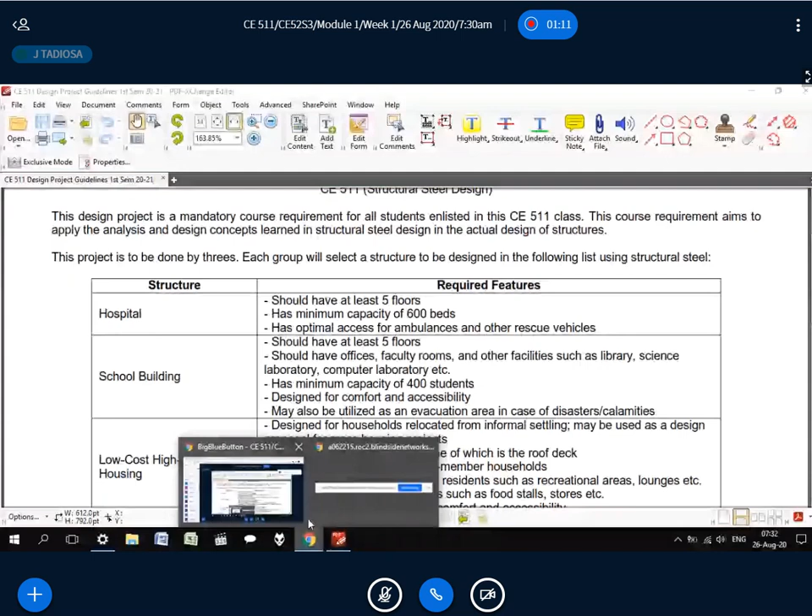Do you see this one, the PDF file? Yes, sir. Okay, so, all right.

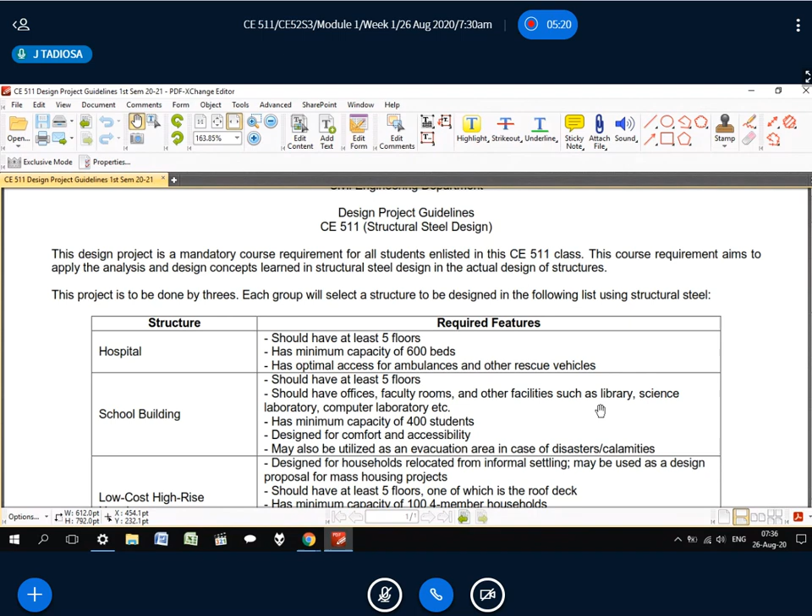This project will be done by threes, so each group must have three members. Each group will select a structure to be designed using structural steel: a hospital, school building, or low-cost high-rise housing. Here are some of the required features I have to see in your design project.

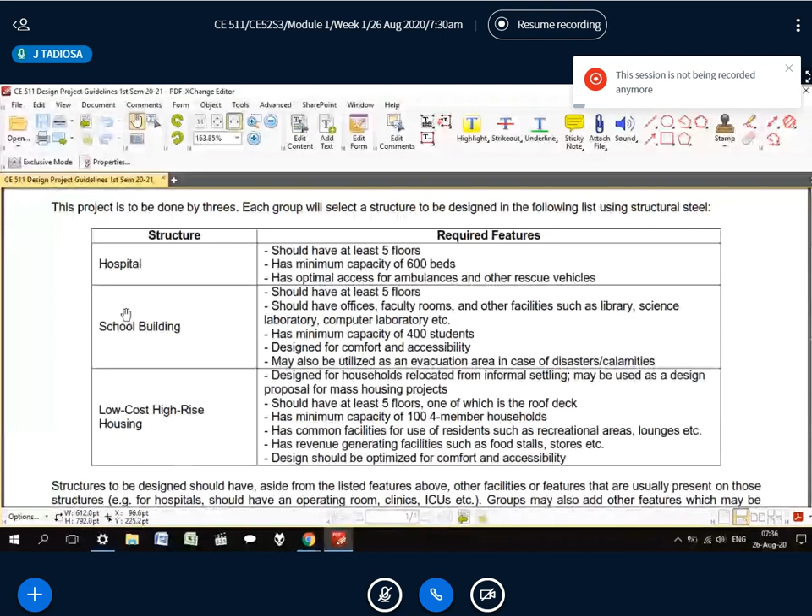For hospitals, it would be this one. For school buildings, it's this one. For low-cost housing, it's this one. Now I want this divided equally among the groups, so I will be the one to assign you to a certain structure. I will do this later on.

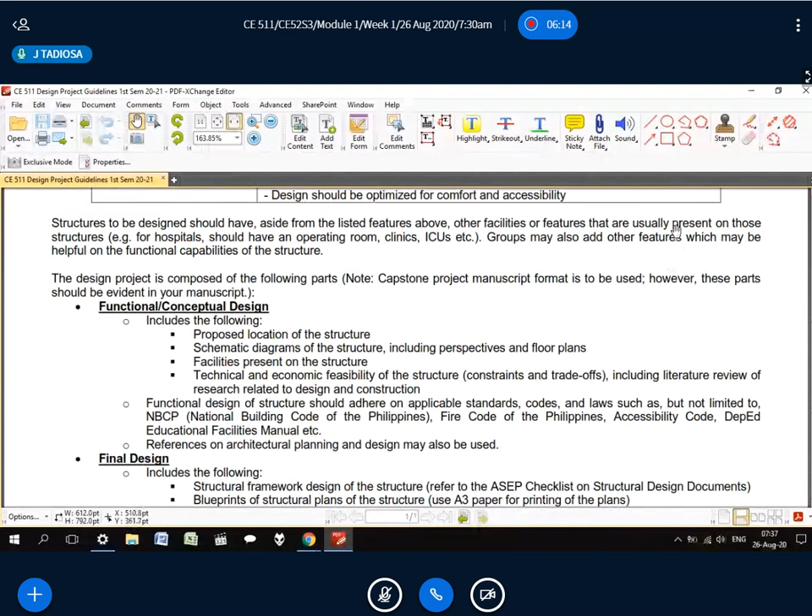Structures to be designed should have, aside from the listed features above, other facilities or features usually present in that structure. For example, for hospitals, design it like a real hospital—it should have an operating room, clinics, ICUs, and other facilities usually present in hospitals. Same thing with school buildings—it should have classrooms, faculty rooms, libraries, laboratories, etc.

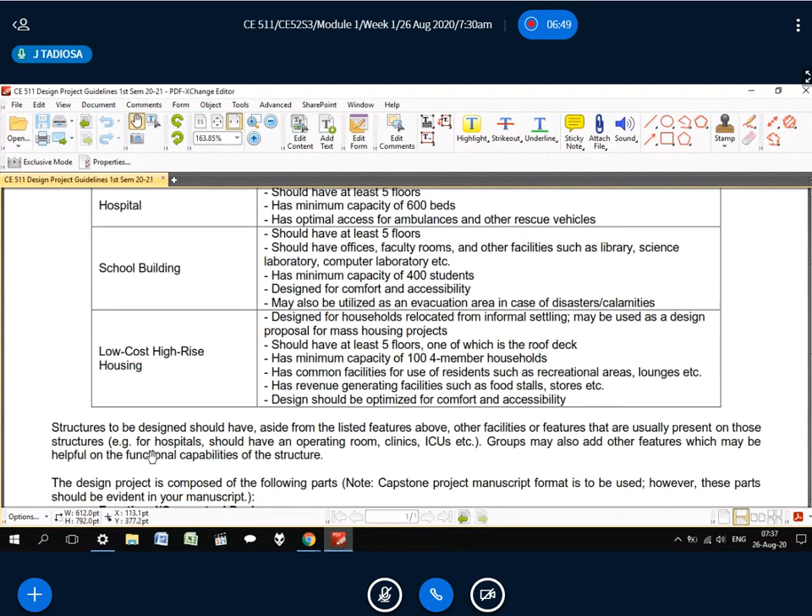Groups may also add other features which may be helpful for the functional capabilities of the structure. When we say functional capabilities, we mean the usage. I will discuss this more later on.

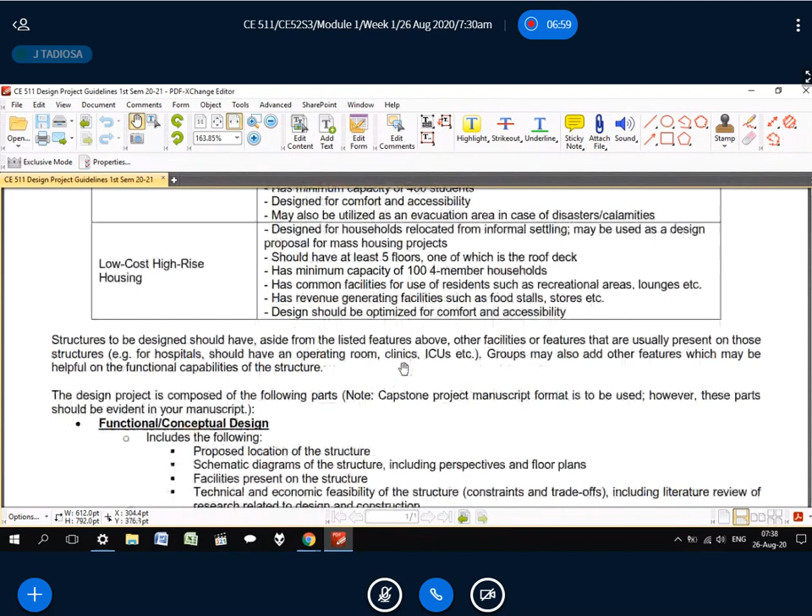The format for the design project is pretty much the same as the capstone, so it will have 5 chapters. I will present a sample manuscript later on. The design should be composed of 2 parts: the functional or conceptual design and the final design itself.

Functional design means you conceptualize the design itself. What do you include here? The proposed location, the schematic diagrams, meaning the building plans, or as we call it, architectural plans. However, I avoid using the word architectural—in this class we call them building plans. Also, facilities present, technical and economical feasibility.

This one is the constraint and trade-off—I will explain this later on. How do you format this? Including a review of related literature related to design and construction. Functional design should adhere to applicable standards, codes, and laws, such as but not limited to NBCP, the building code.

As far as I know, you already learned about this during your building design classes—the Fire Code of the Philippines, the Accessibility Code. For school building design, you also use the DepEd Educational Facilities Manual and other manuals that may be applicable in your design. References on architectural planning and design may also be used, and you may seek help from architectural students as to how to do your schematics.

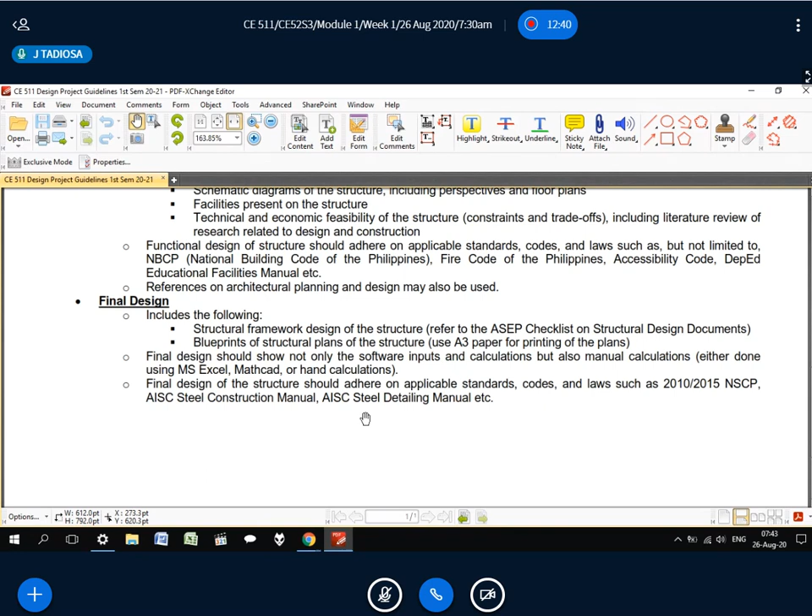The final design of the structure should adhere to applicable standards, codes, and laws such as the 2015 NSCP, not 2010 anymore, the steel construction manual, the detailing manual, etc. Another note here, in making structural plans you need to adhere to the AISC steel detailing manual as well as the format prescribed by the National Building Code. However you arrange the title blocks and the figures there, you should follow the standard rules.

So it has to look like one of those plans that you see at work.

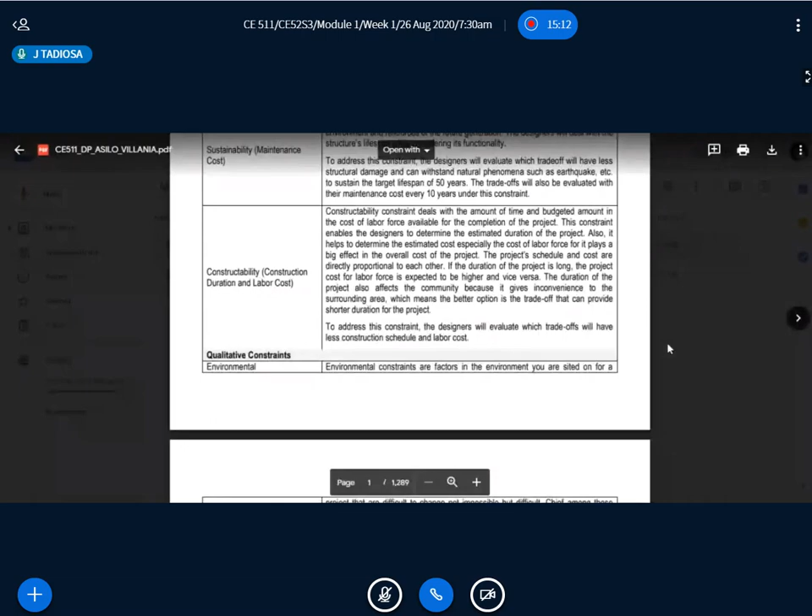The first page that you have should be the design experience information. This one has the same format as that for the capstone design. They lay out the constraints, the trade-offs, the quality standards, etc.

The rubrics don't need to be attached in this case, but they just attached it because they didn't know what to do at that time. They just used the same rubrics as the one used in capstone design. However, in this case, no need to attach the rubrics. So this is the table of contents.

This one is the intro, pretty much the same as that of the capstone: background, location, project client, client specs, objectives, scope and limitation, and the project development plan.

Next is chapter 2, this one I am a bit stricter about. The first thing that I want to see is the location data: the vicinity map, the demography and socioeconomic data, topography or topographic map.

Hazard maps, there are many types: landslide hazard maps, flood hazard maps, ground shaking and rupture, landslide both rain induced and earthquake induced. I don't think they have the liquefaction hazard map, but I also want you to include that, and also the wind hazard map.

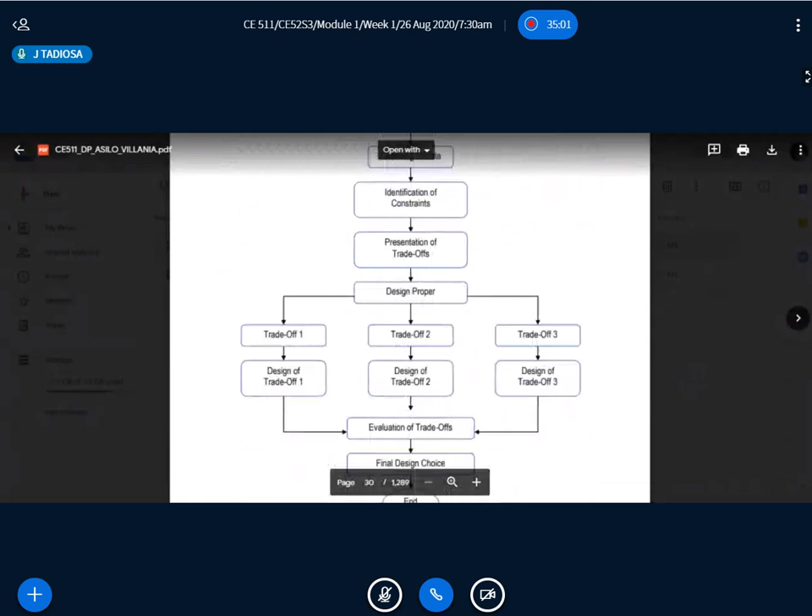So here, chapter 1 is just the same as that of the capstone. Chapter 2 is the location data, so first the vicinity, demography, and socioeconomic data. So they only have the population here.

Topography, so here's the topographic map. They cannot acquire any contour maps either from NAMRIA or from the LGU.

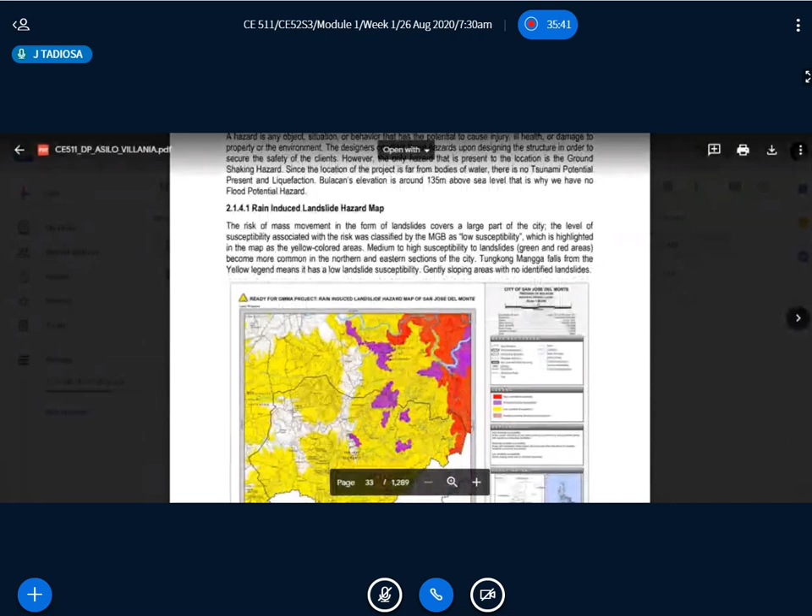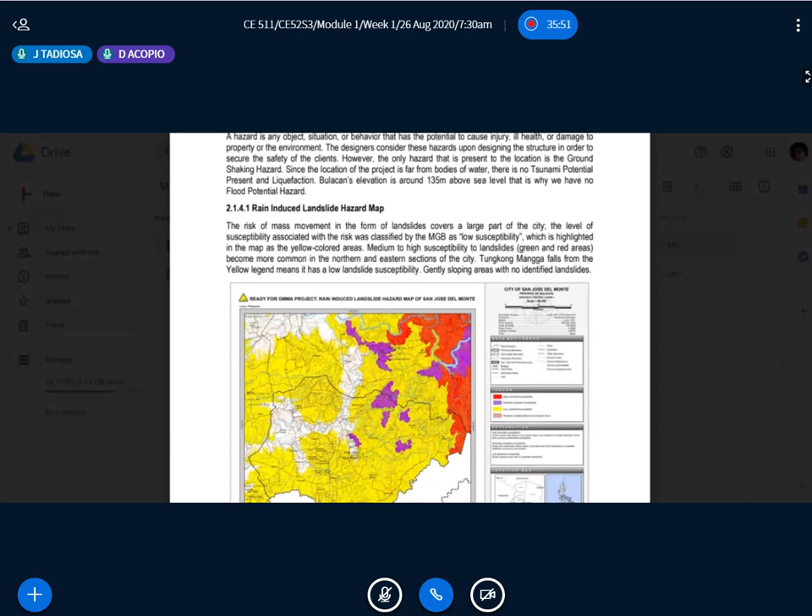And then hazard maps. You may obtain them either from the LGUs or you may use Project NOAH of the DOST, UP, and other related government agencies.

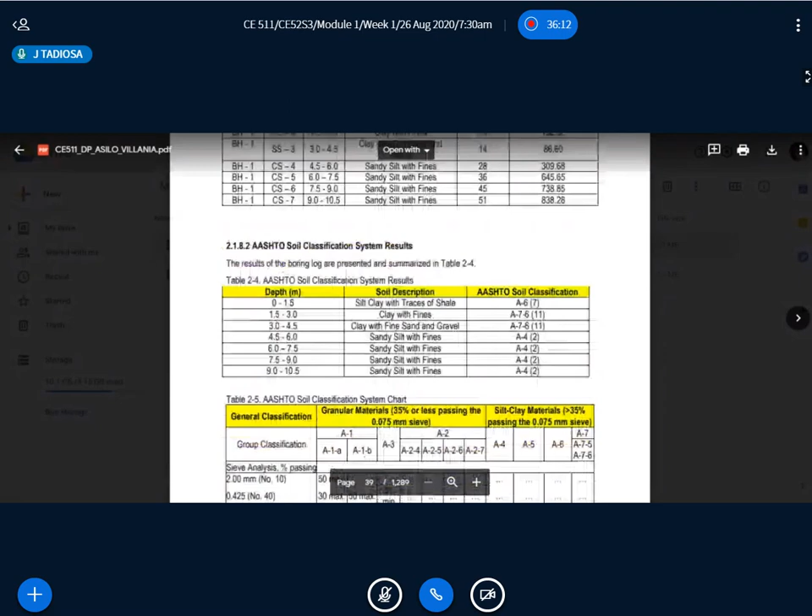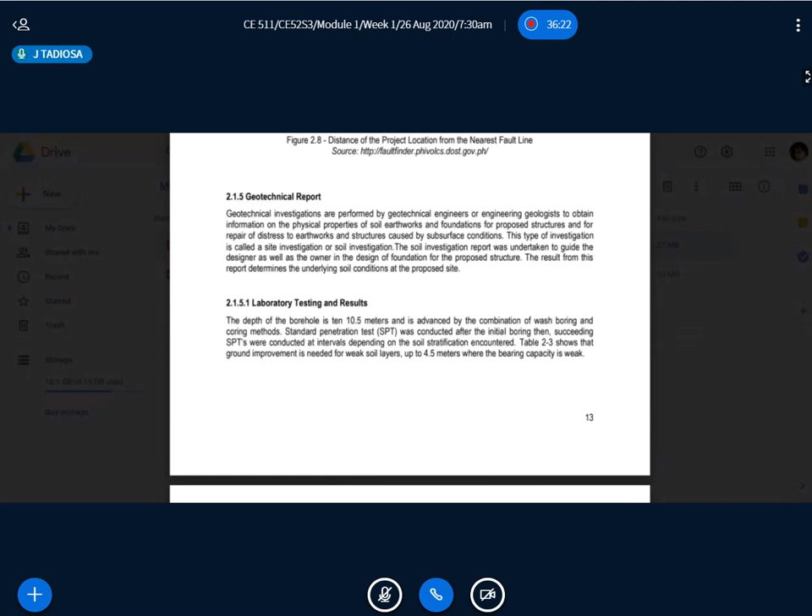Then the distance from the nearest fault, then the geotech report. I don't want you to copy paste the geotech report if you have one. You need to summarize them, to paraphrase them. So in this case, although they have the original copy of the report, they tried to summarize the findings.

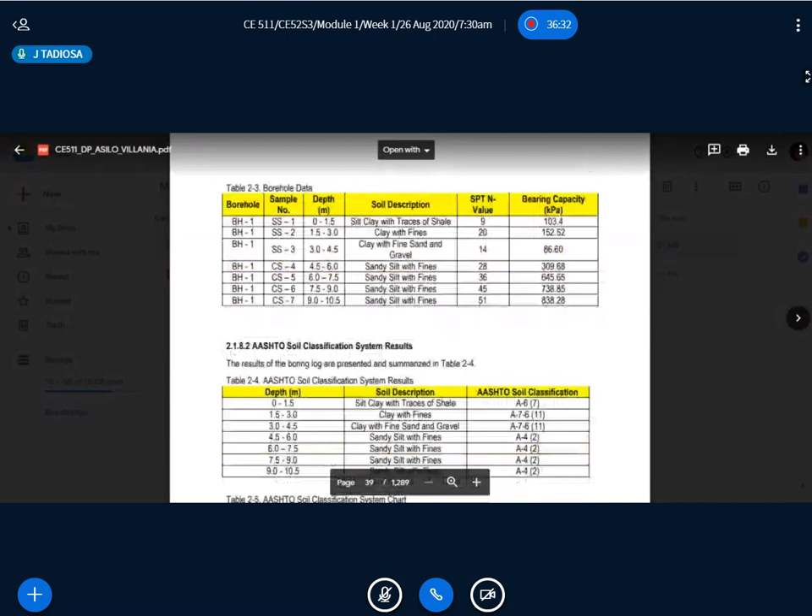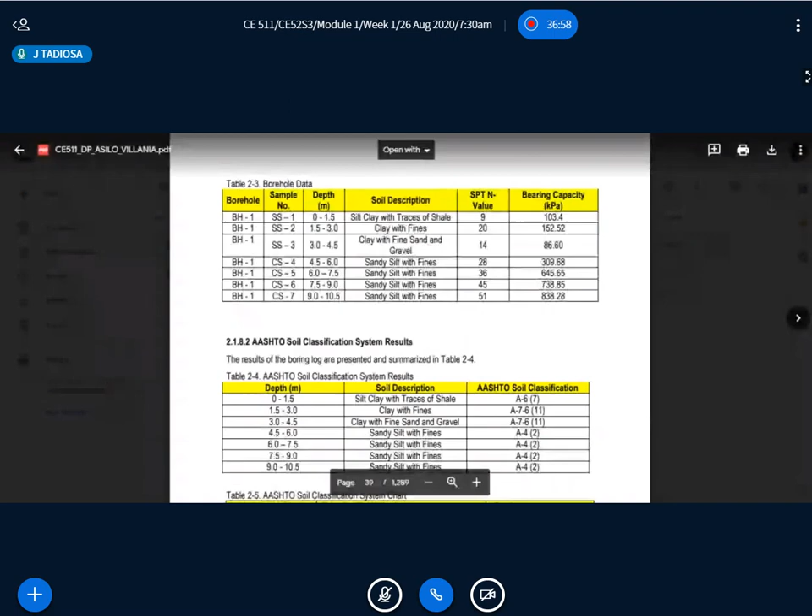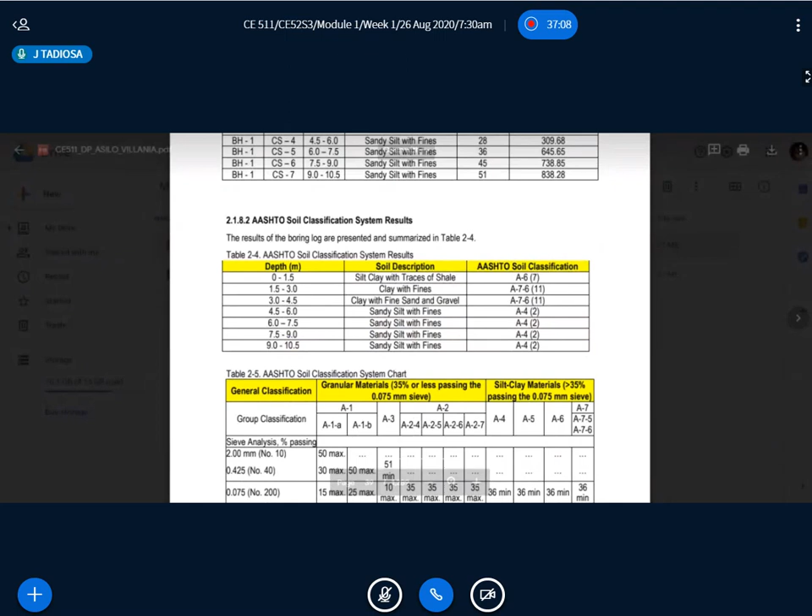If you observe, there is AASHTO instead of USCS, precisely because this one is for highway construction. It is better to use the USCS soil classification. Now, if you only have the AASHTO but will use it for a building, you need to make your own classification based on the geotechnical test results and laboratory results.

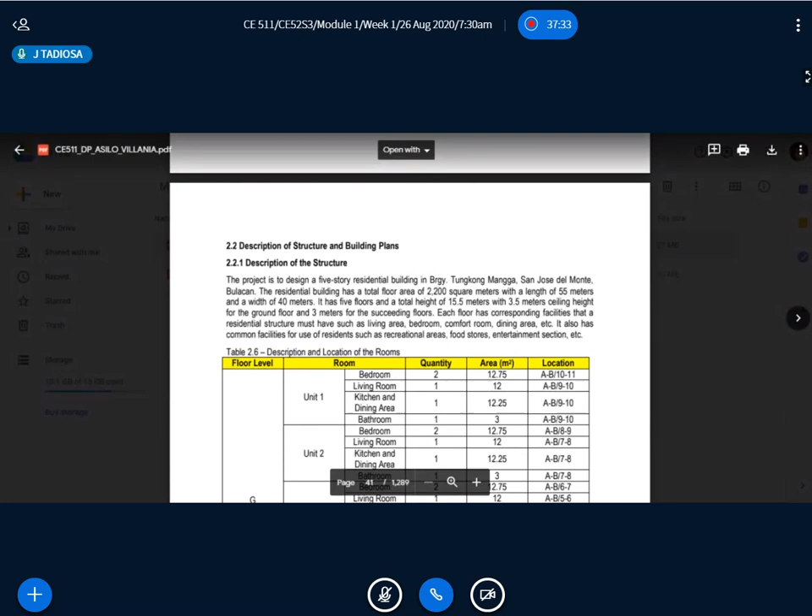Then they have the geologic map here. Then description of structure: what are the features for each floor, so on and so forth. The general description, the makeup of the structure, what are the facilities, and the grid lines here based on your plans.

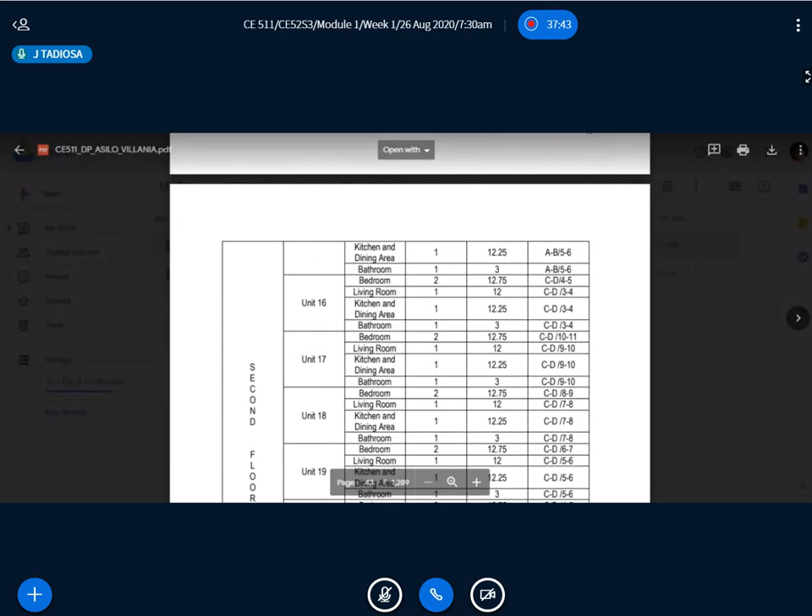And then there's the plans. I have a bigger copy of this one, so no need to show it here.

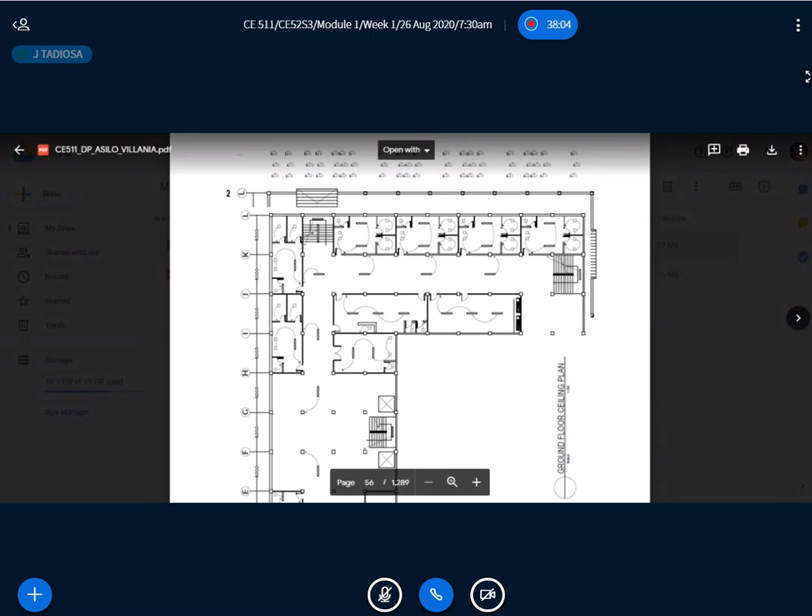Then the loads. You need to explain how you determine those loads. For example, dead loads, you show this one.

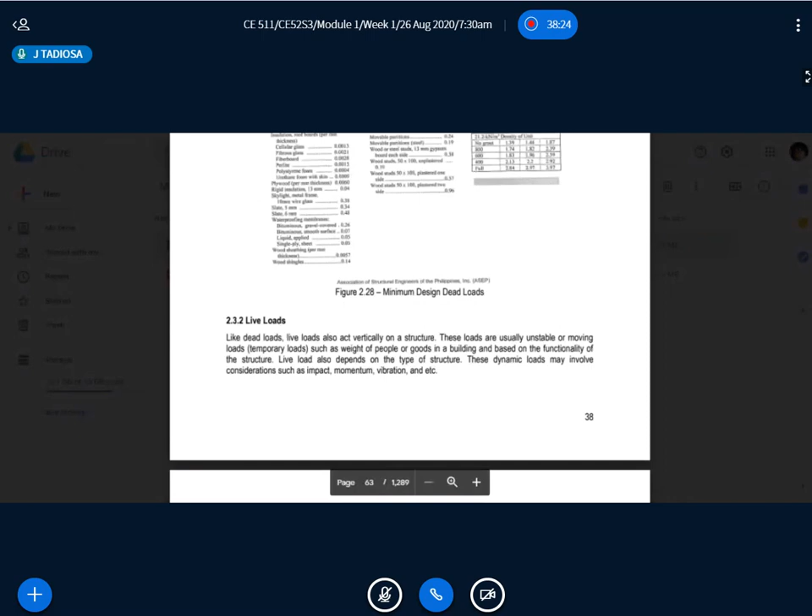The live loads, it is better to show where you found them, so they cited the specific section where you can see this.

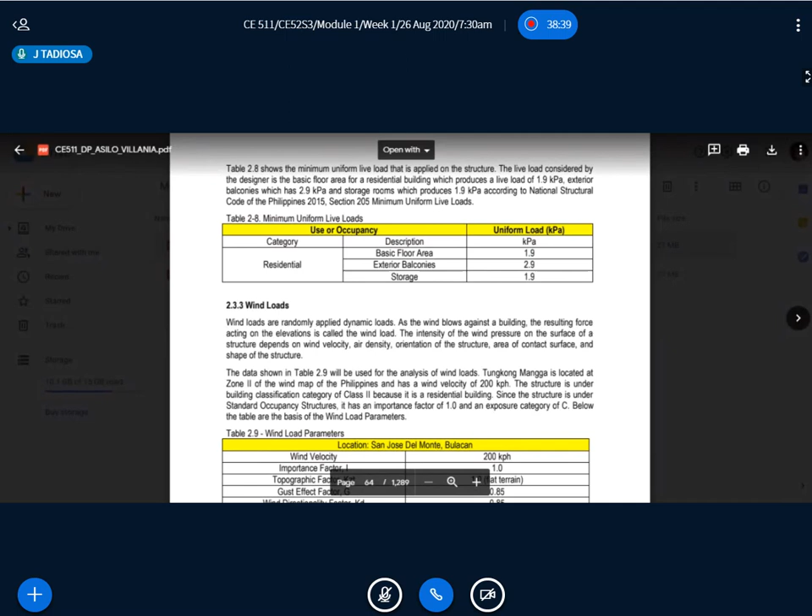The wind loads, these are the parameters, and they explained how they obtained these parameters. There's the wind map, the project location, and the contour map. This can be found in the 2015 version. Now if you use 2010, it is a bit different because there's only 3 zones, so I don't want you to use that.

Wind maps here are different depending on the occupancy category of your building. For category 1 and 2, you use a different wind map. For 3, 4, and 5, this one. In this case, this is a standard residential building, so they use category 4, since it is in category 4 you use this one. And then there are the values, the wall pressure coefficients.

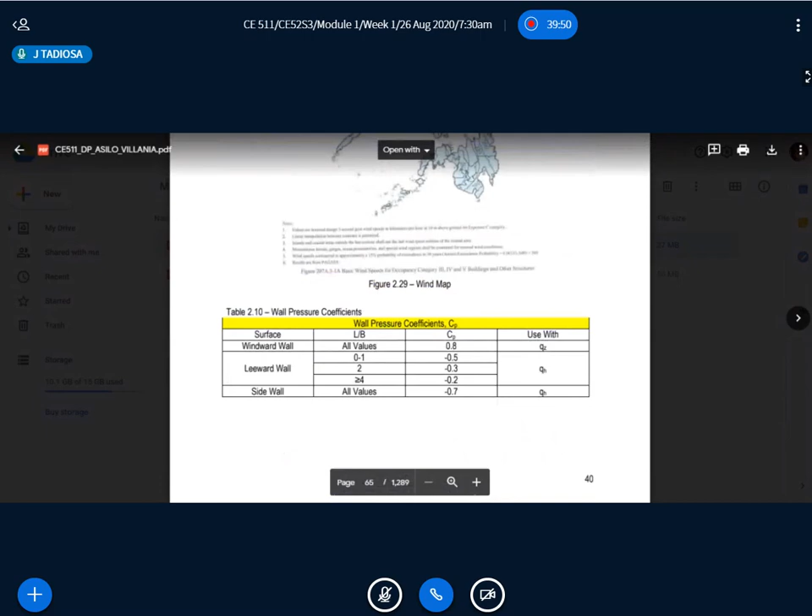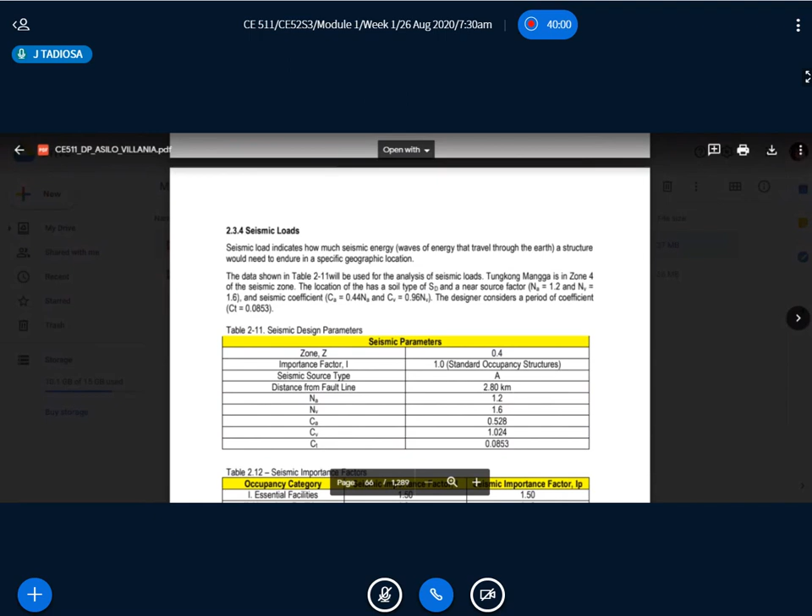Seismic load, same thing, you need to explain how you obtain these parameters. And then the seismic map, so here's zone 2, zone 4.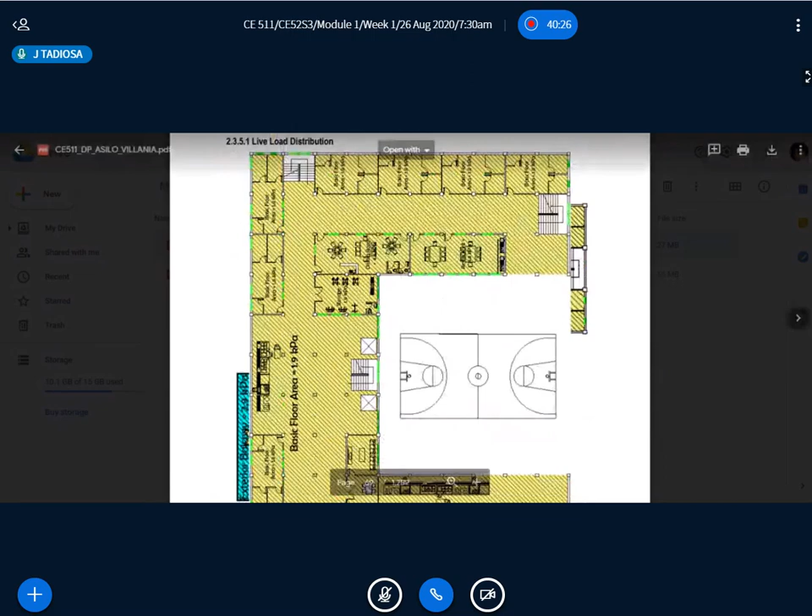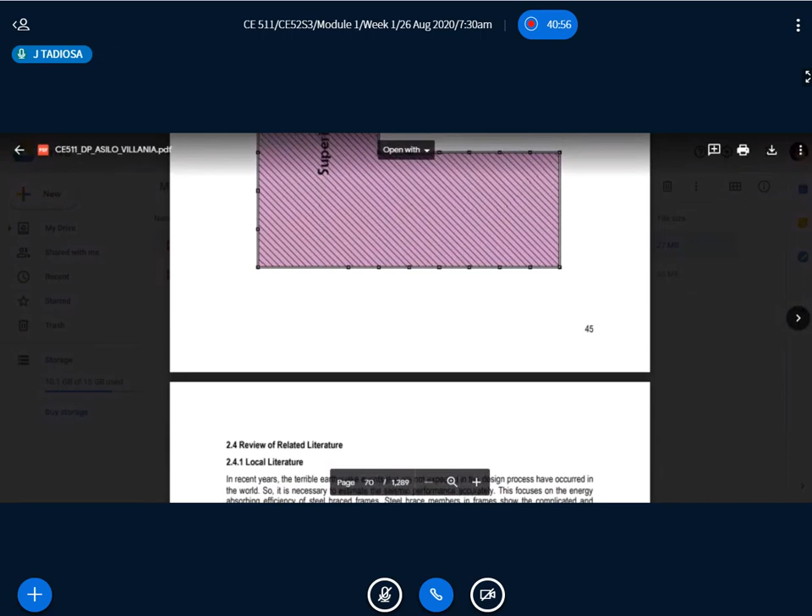The load distribution maps, or load mappings, are just like when you were in kindergarten, you just do some coloring. So this color means the live load. This color signifies that the live load here is 1.9 kPa, and for the balconies you use 2.9 kPa. For the dead loads, everything is 4.42. So that's one example of load distribution.

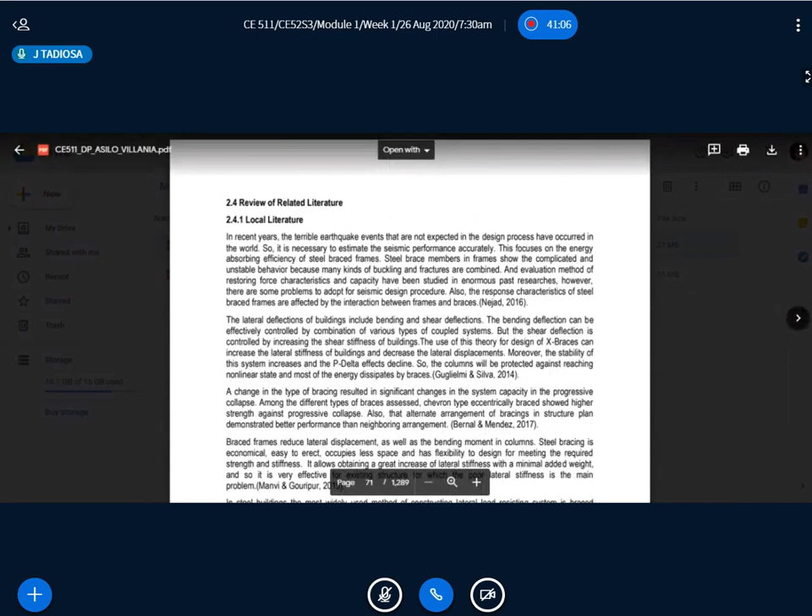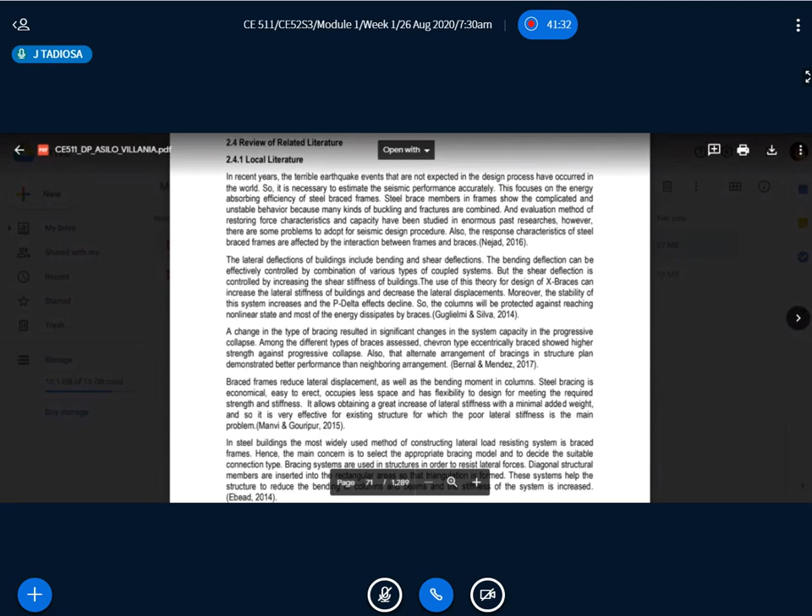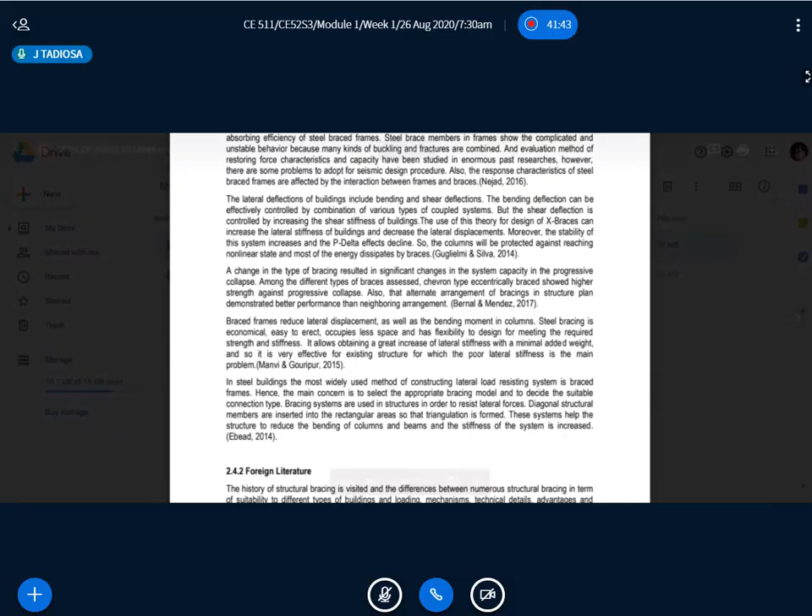Then for RRL, I want you to not just enumerate the papers that you were able to find. I want you to consolidate all of the ideas that you have obtained from those papers, and make a summary, an annotation of the ideas you found from those papers. So they put it this way, which is a bit good. As I have said earlier, there are many students who struggle with this one.

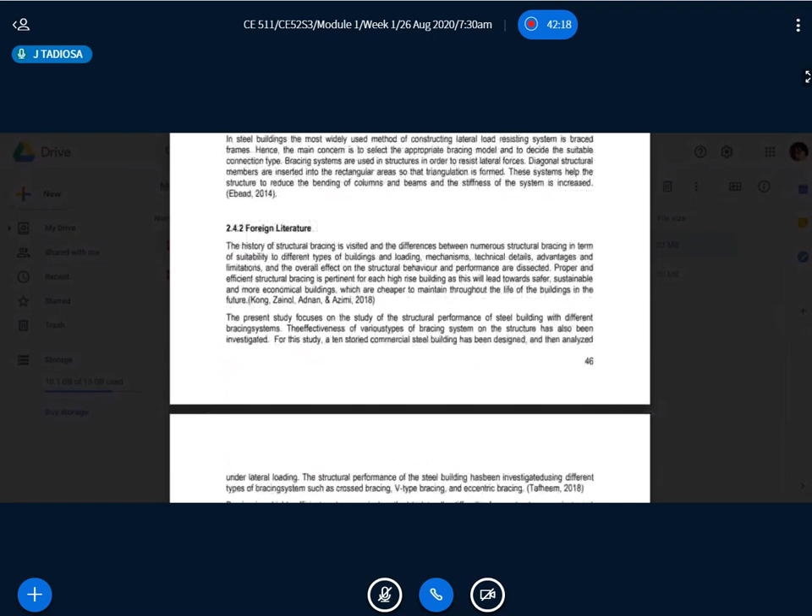This one is also important, the review of related literature, because this will be the basis on how you select your trade-offs based on your constraints. For example, based on their RRL, bracing is highly efficient to resist loads due to wind or earthquake. That's why in their trade-offs, they propose brace systems, precisely because they found out from their RRL that bracing is a good method to resist lateral loads. So that's one example of how important the RRL is in formulating and determining your trade-offs.

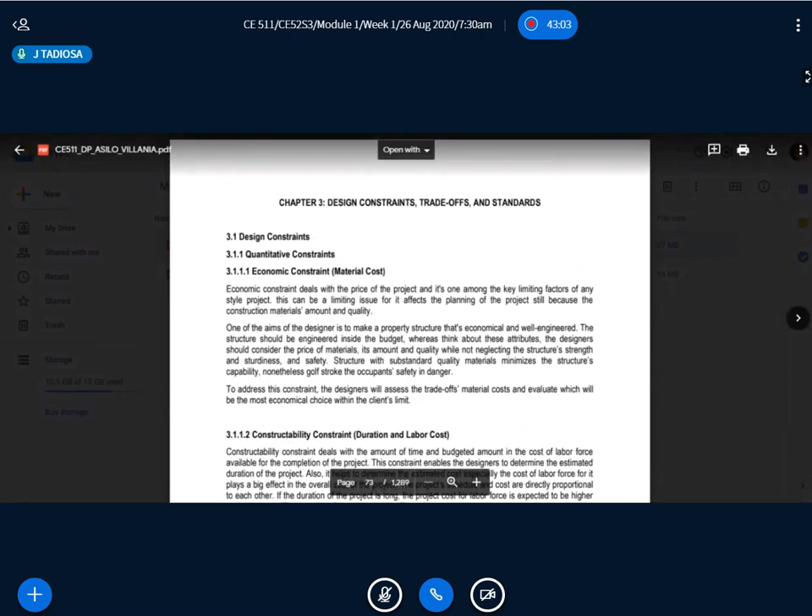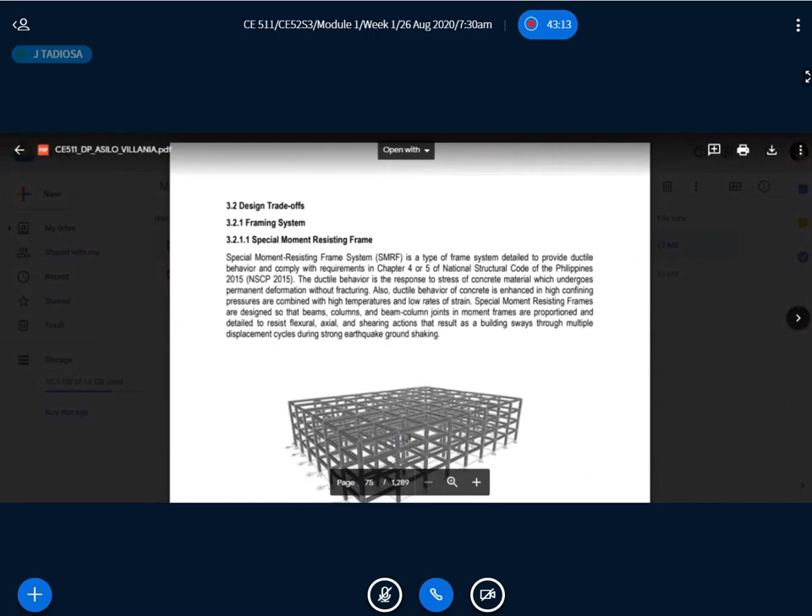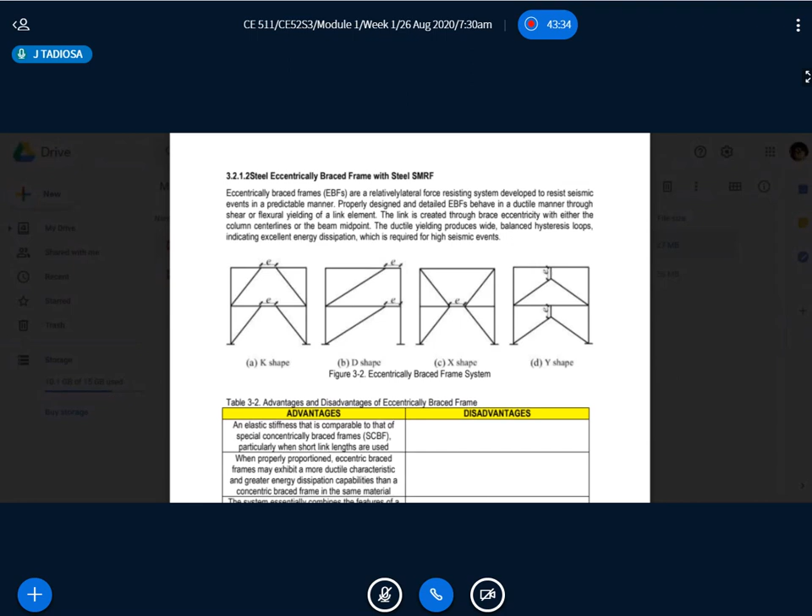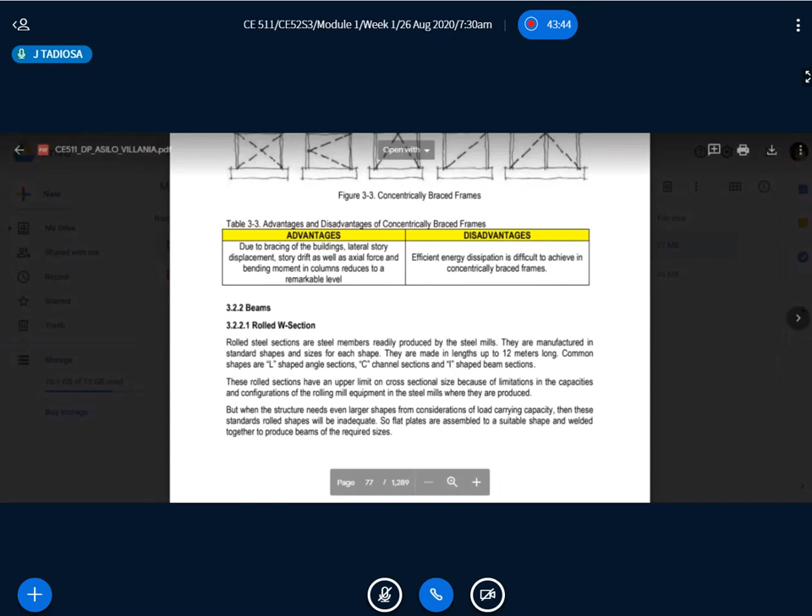Then for chapter 3, here are the constraints and the trade-offs. You select the trade-offs based on what you found out in your RRL. That's why they again have the brace frame system, proposing brace frames precisely because their research, their RRL, shows brace frames are effective framing systems for resisting lateral loads. You just put the advantage and disadvantage of each trade-off, for the beams, the columns, everything.

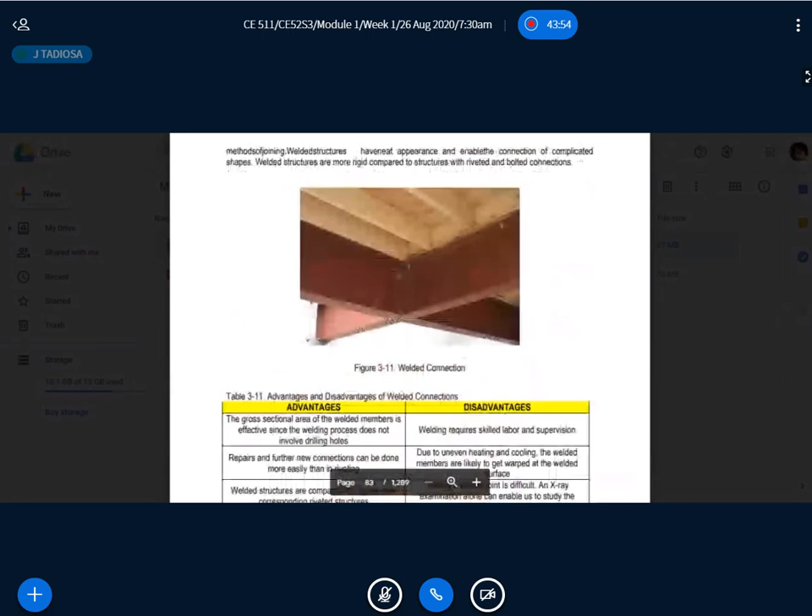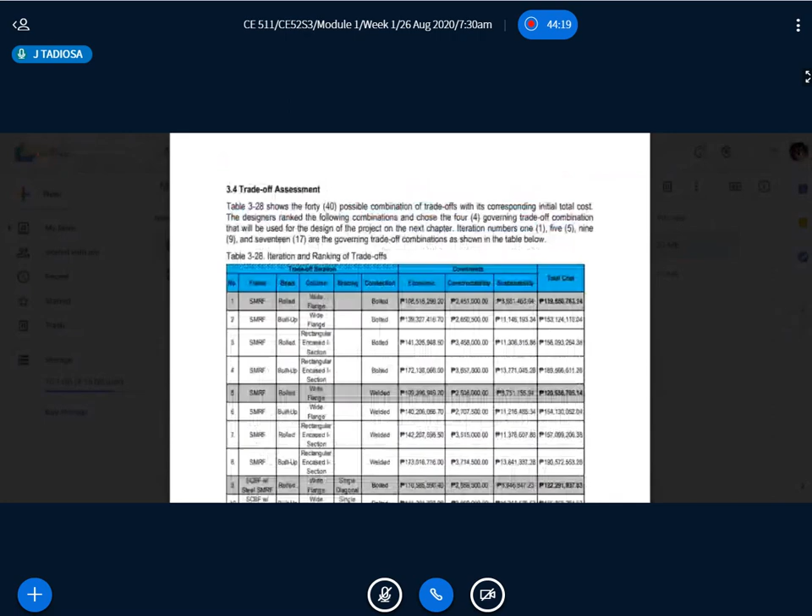And here's the ranking, so they rank each trade-off. And then where should I see them? This is what I have, this is what I mean when I said that you need to combine each trade-off. In this particular case, they have around 40 combinations. I said earlier there are 48, but

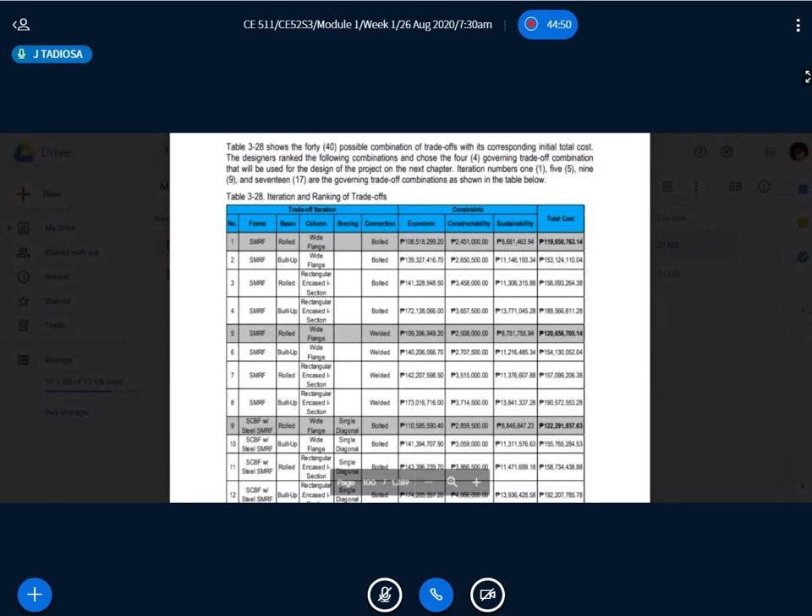that's not necessary because in SMRF you don't put bracing. So you combine each trade-off and then determine the initial rankings based on what you found out. The trade-off results showed that the top four prospective trade-offs that would win the design are these four combinations right here. So that means you will only design these four, the rest you don't need to bother about.

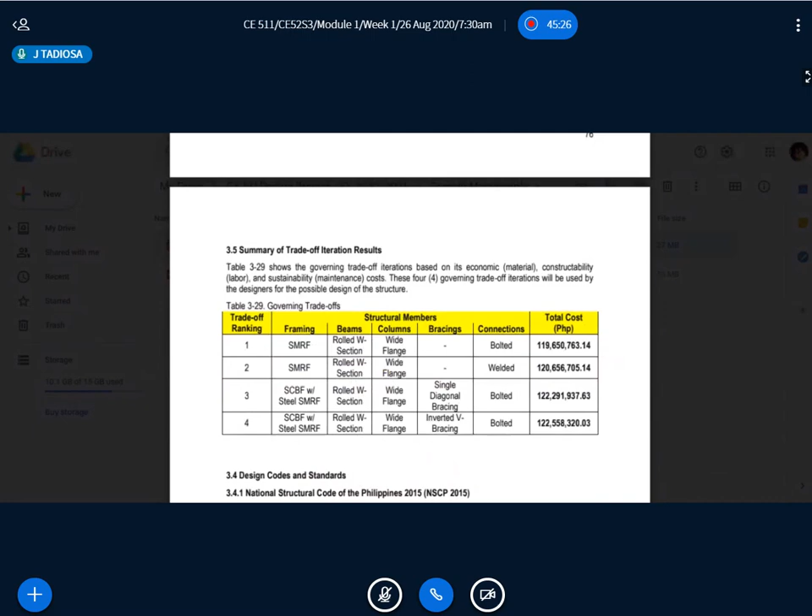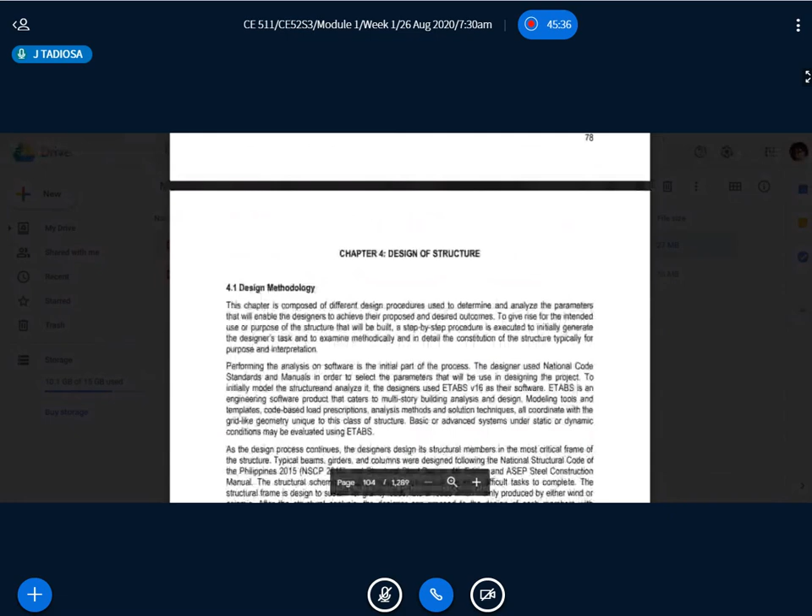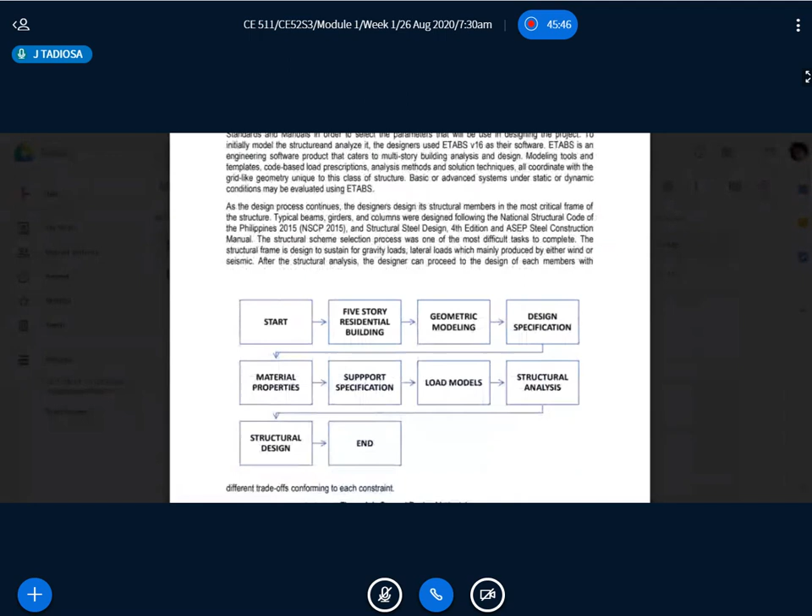So the design codes here, and the particular sections you need to use. Then chapter 4 explains how they go around with the structural analysis and design process, and the flow charts for the design of each member. One thing I always see - we cannot see the formulas precisely because I only use the viewer from Google Drive, but if you open it using a PDF viewer, you will see them.

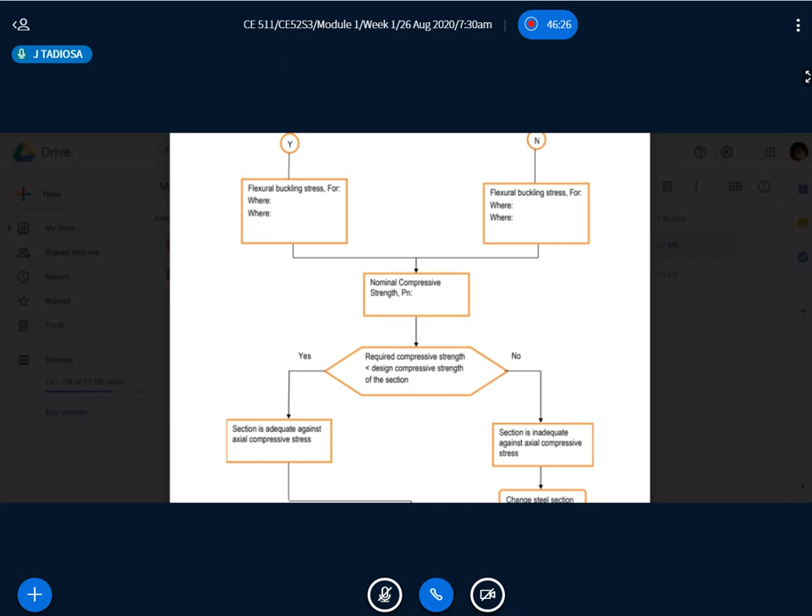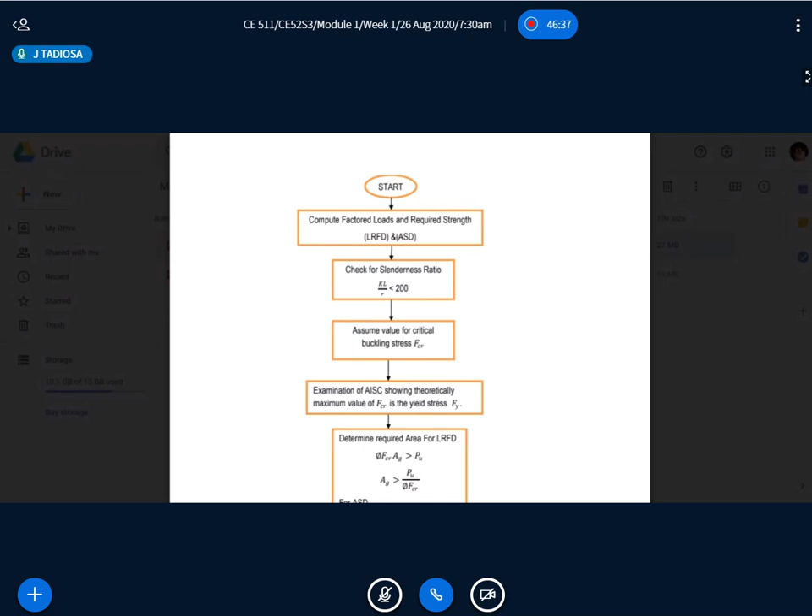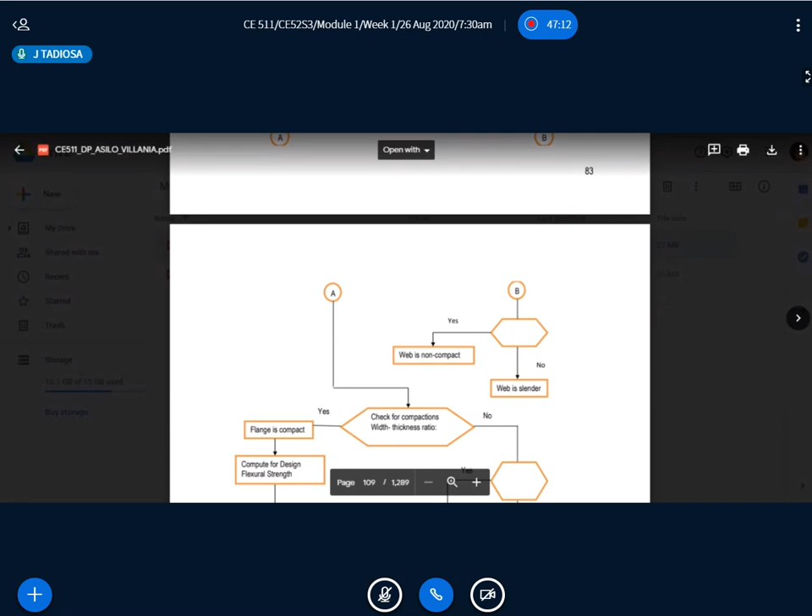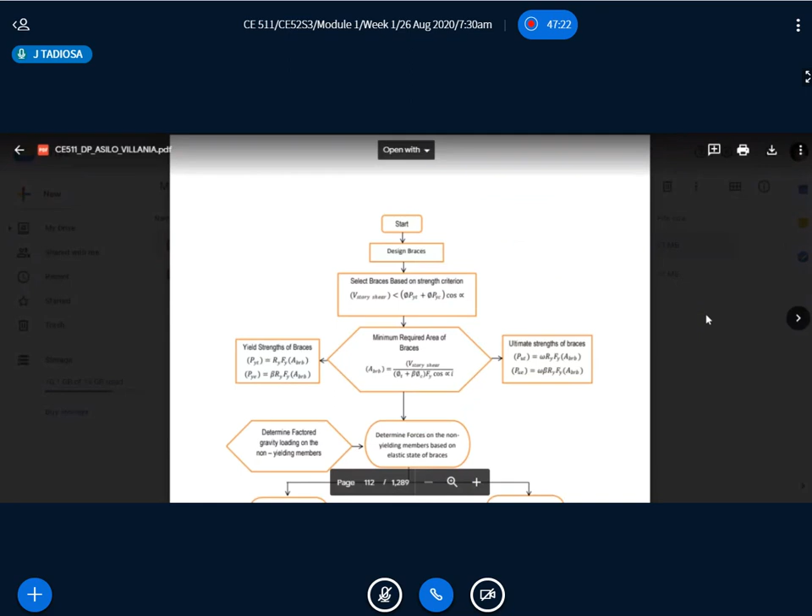One thing I always observe when others are submitting is that they use 2001 - that's evidence you only copy and paste the flowcharts. I want you to make your own flowcharts as to how you go around with the design. The thing is you don't really have to worry much about this because usually when I discuss design, I always discuss the step-by-step procedure as to how you go around with them.

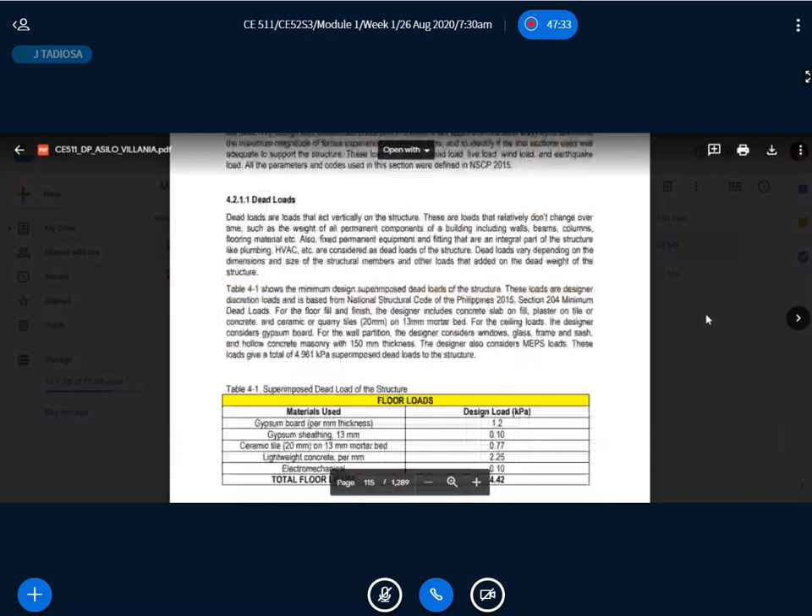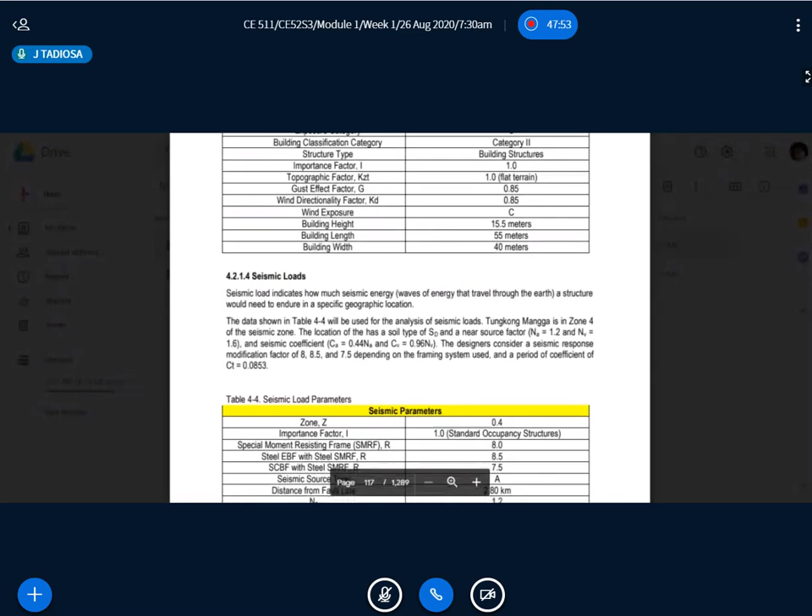So meaning as long as you follow what I present during the lectures, you will be able to make your own flowcharts. And then structural analysis - you summarize the loads. Although it's already in chapter 2, you still need to put them here, although it should be more summarized, a lot shorter, because this will be inputs. And then the load combinations that they use.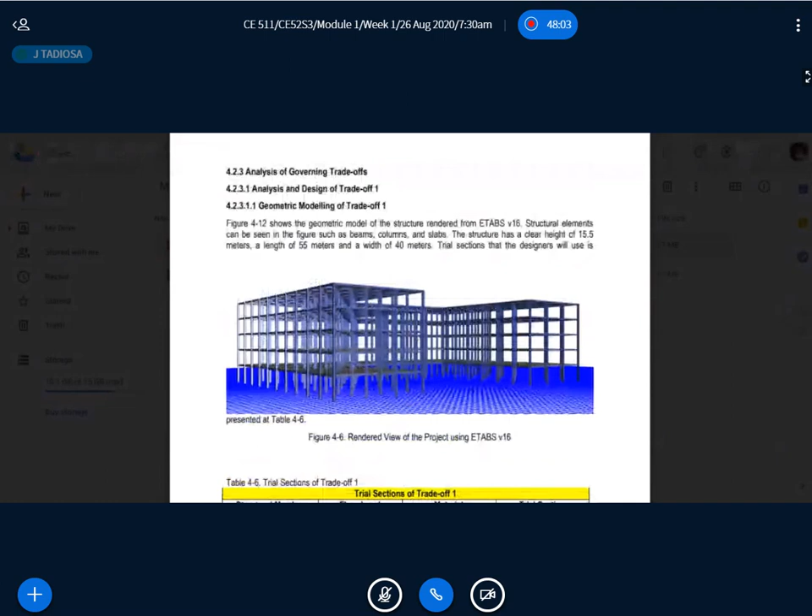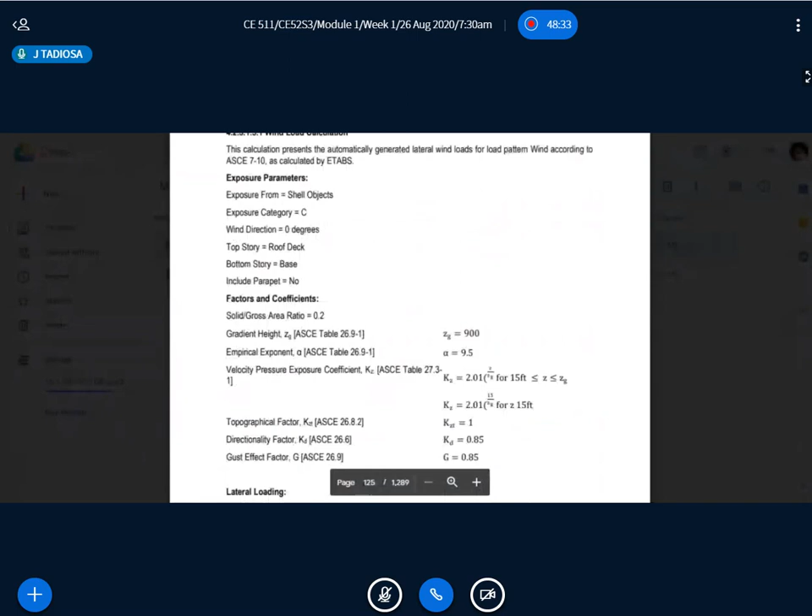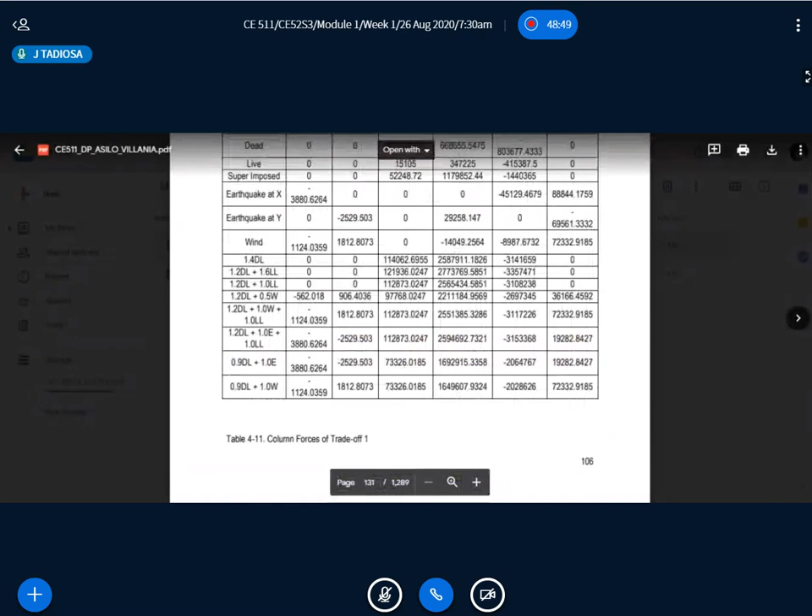They do the analysis and design for each trade-off, and then they have the trial sections, and they analyze it - the actual forces, shear forces, torsion, bending stresses, although we cannot actually see them here. And then based on the analysis results, you will now perform your design. These are all part of the structural analysis - the reactions, the column forces, beam forces.

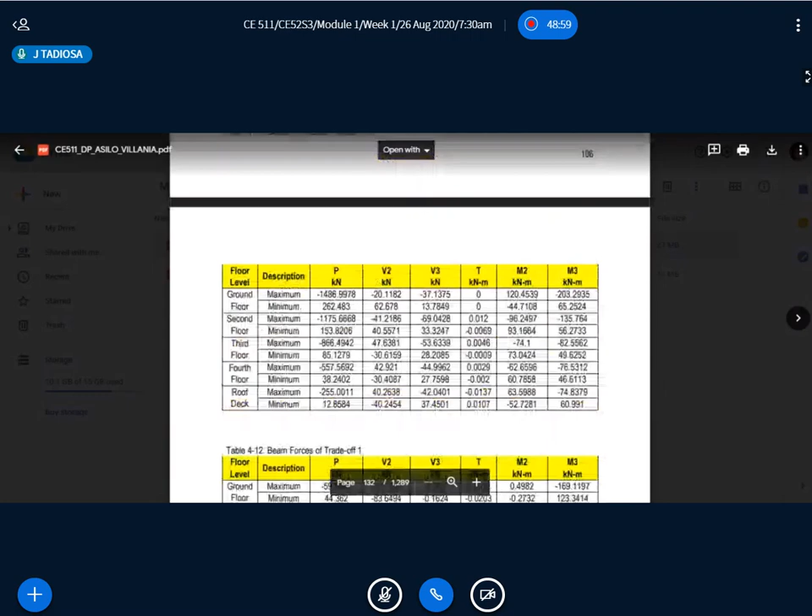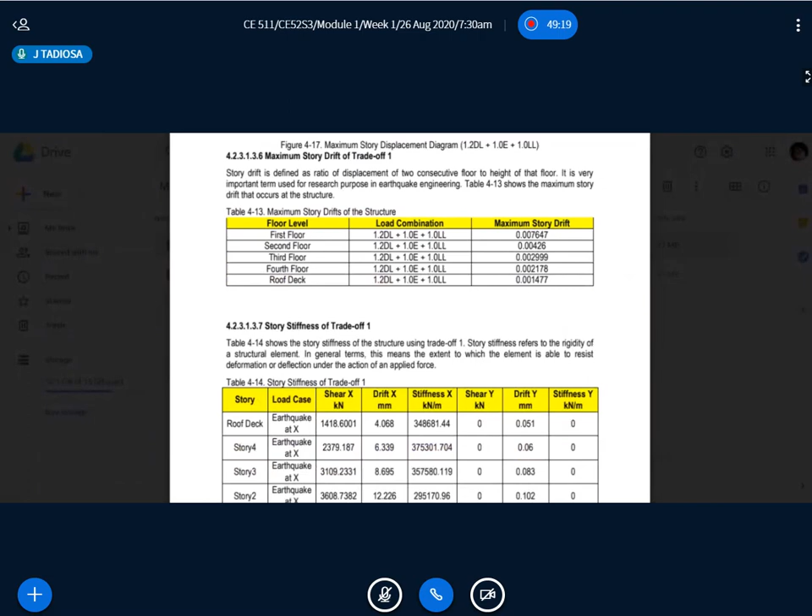So per column, they usually only pick the maximum minimum, same thing with this. And then they also check for the displacements. I think they pass the drift requirements - so in the wind and earthquake load sections, you do not just have to present the drifts, you need to check if it passes the code requirements. I think it's L over 240.

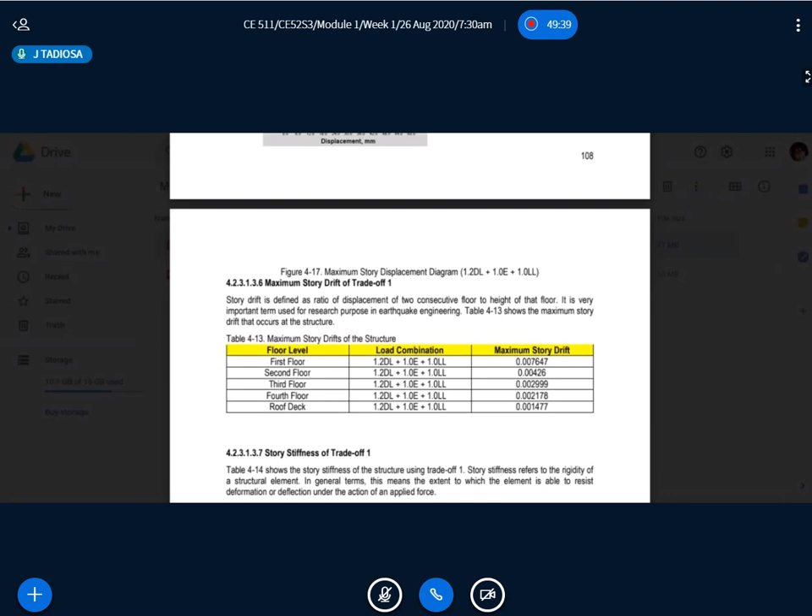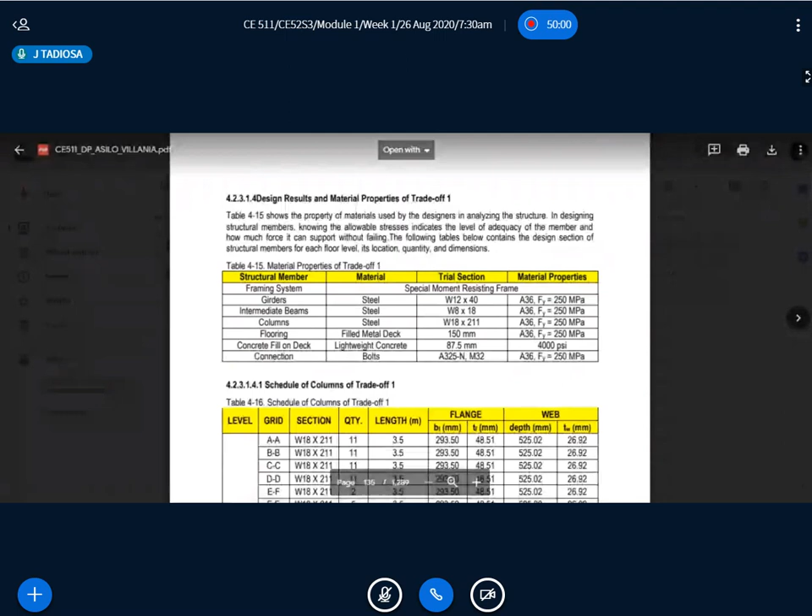L is the height of the story from the ground, so you just need to check the NSCP specification for drift. And then they have the design results. I think they did it manually - you will do this manually, so they did not show it here, but then

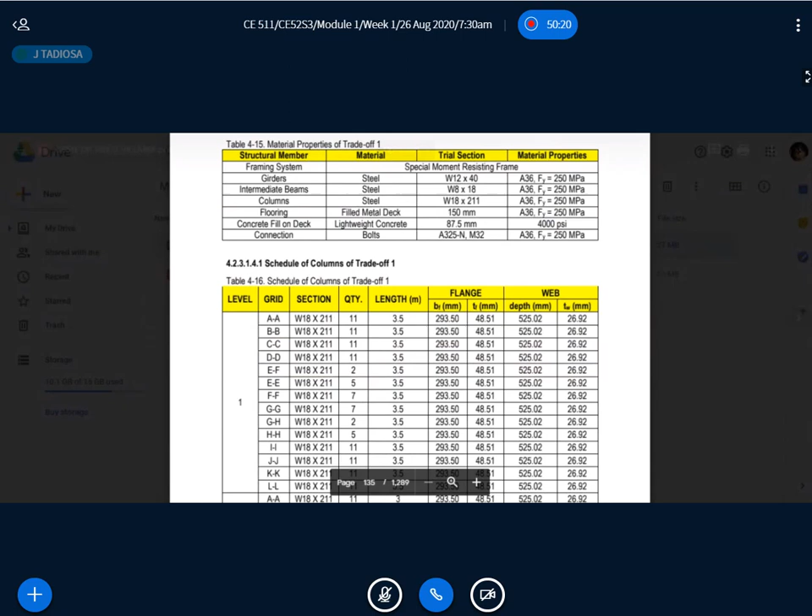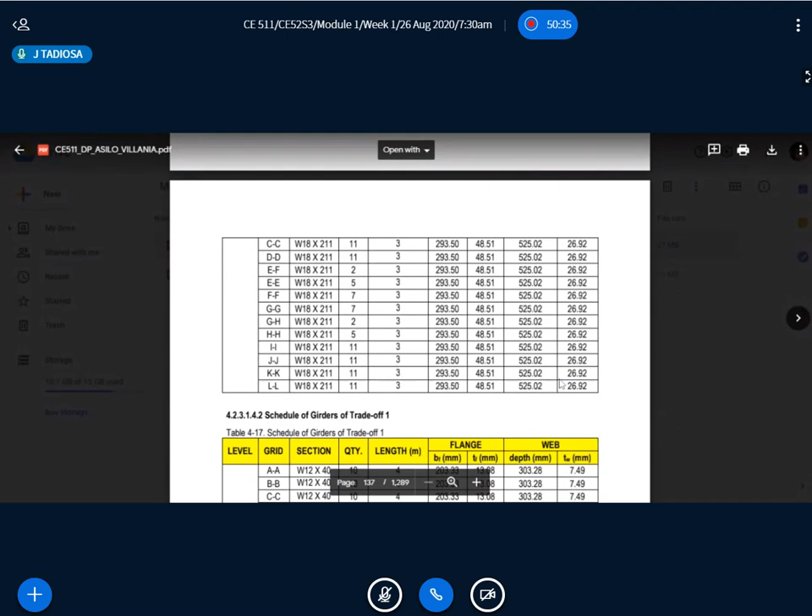in the appendices they have their manual calculations, the Excel files for this. So that would be fine - if you want to show the detailed calculations, you can put them as appendices. Well, you don't really submit a hard copy, so it doesn't matter how many pages it would take. In this particular case, they went up to 1,300 pages precisely because in their appendices they put pretty much everything there.

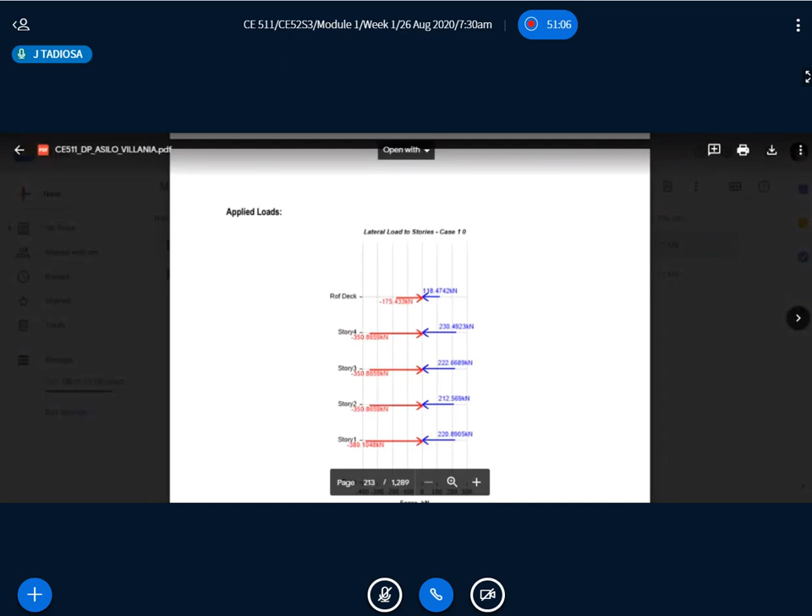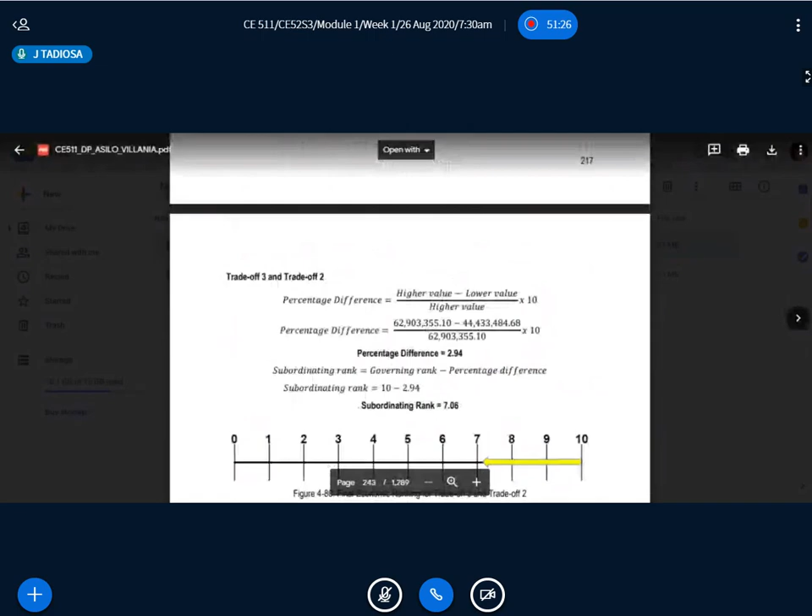Once you have this, you do the analysis and design for all four trade-offs, and then you do the final rankings, and whatever the result would be, that would be your final design. In this case, they have trade-off 3 - this one would be the winning design. So for the final design, you will now make your plans based on the final design.

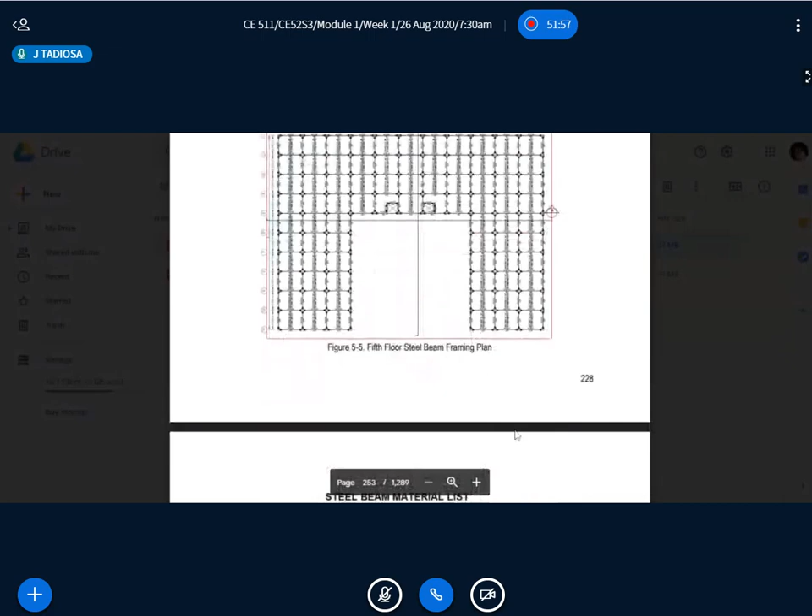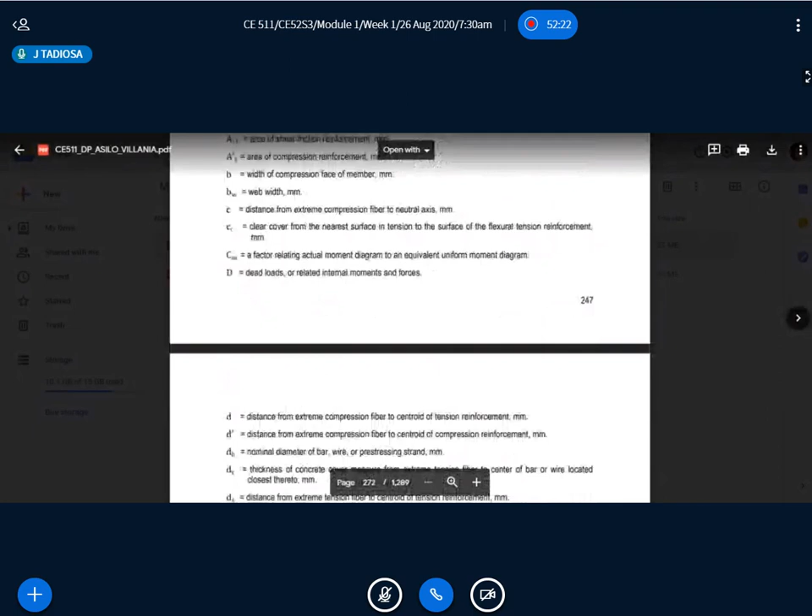And then the details on how you do the connections and all - they also have it here. Then the references, and these are the appendices - everything that you did, you will put it here.